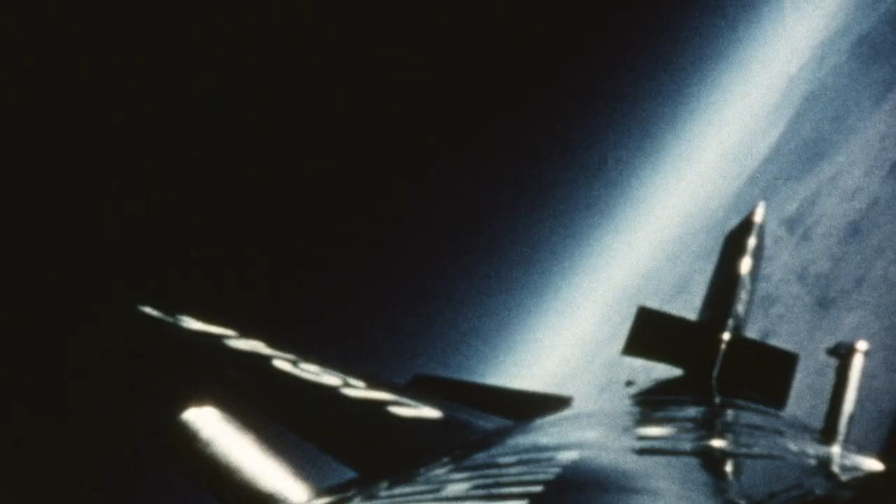Flashing across California desert skies, the airplanes you see here are writing new chapters in the story of man-made flight. There she goes. This is my first opportunity to greet you as Deputy Administrator of the National Aeronautics and Space Administration. Together, you and I must make our new agency the most unusual place.

An organization that can challenge conventional wisdom. We can engineer anything we can write the requirements for. We're going to make your idea work. This particular idea is quite disruptive. A typical flight, of course, starts under the wing of the B-52 mothership. This sleek, high-speed machine would have made Rube Goldberg proud.

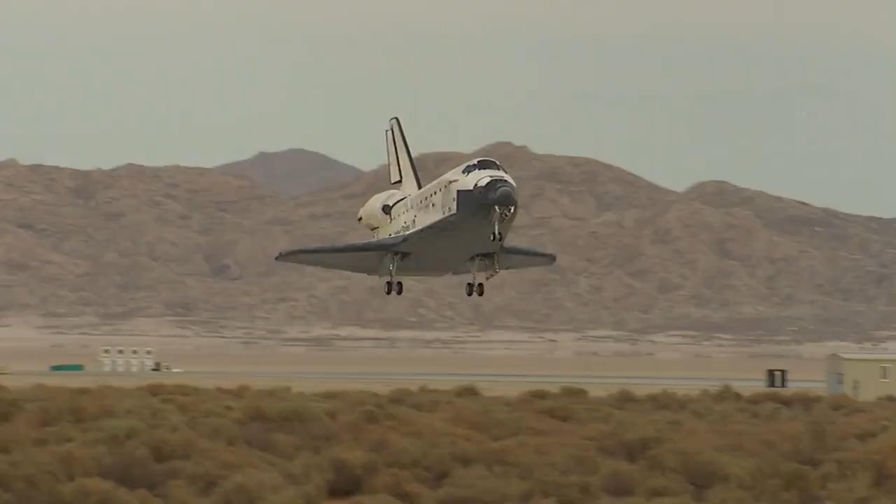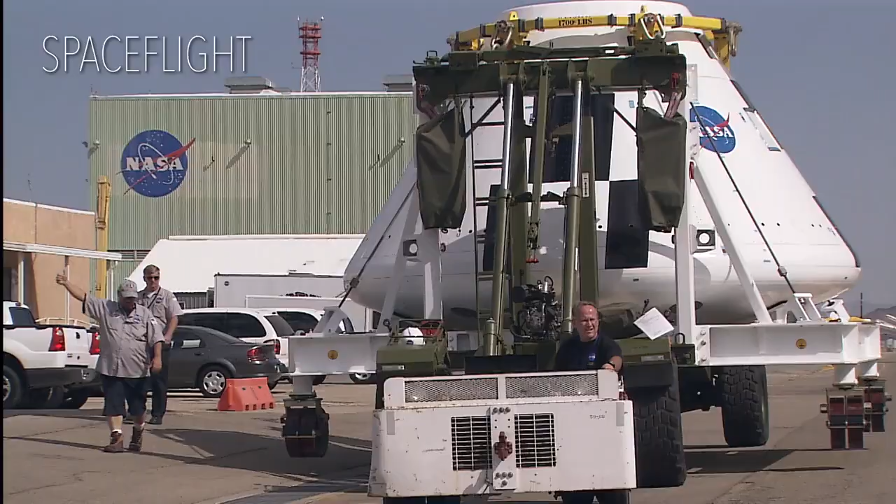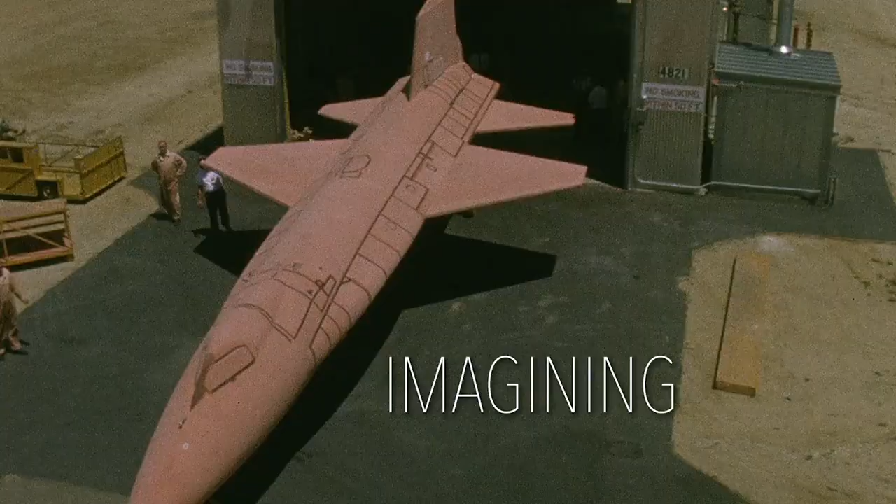The manner in which we fly re-entry from space on the space shuttle was pioneered on the X-15. The X-31 pretty much wrote the book on thrust vectoring, along with its sister program, the F-18 HARV. An observation of an occultation is one of the more challenging missions that SOFIA can do. Right now, we are looking at the dawn of a new era of aviation.

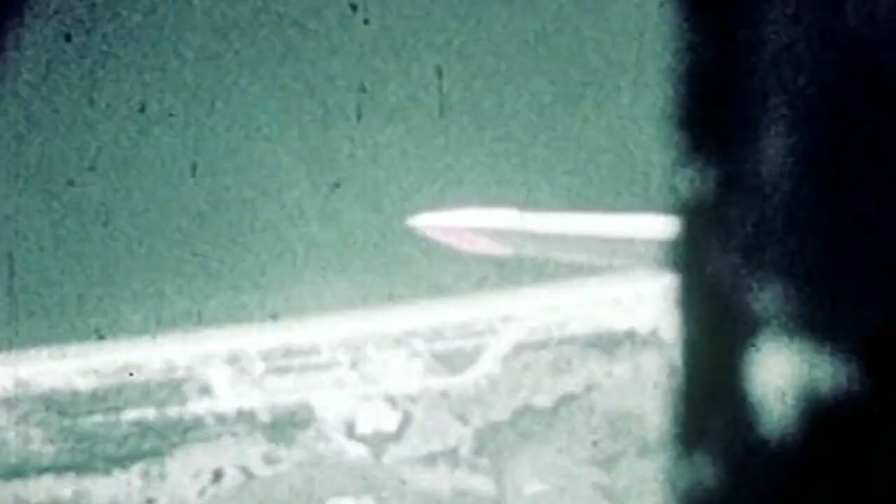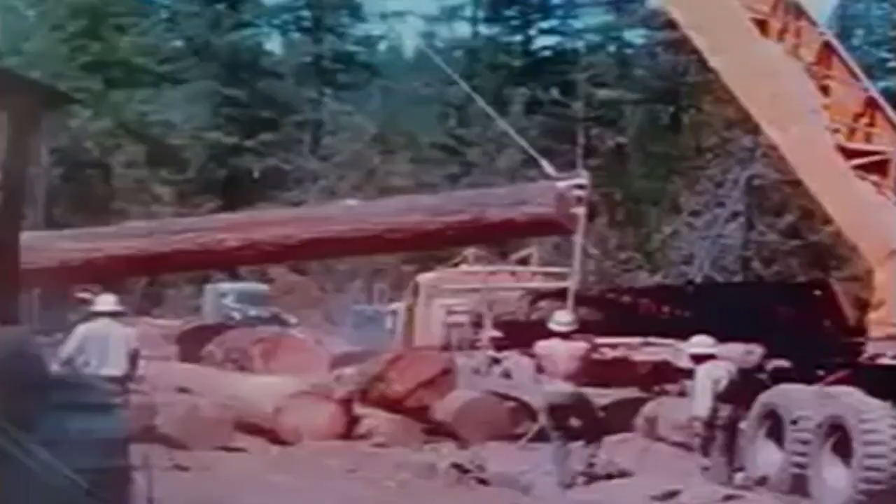Pollution was always something we saw close up, or not at all, until the National Aeronautics and Space Administration gave us a global view from high above. As the world's population continues to grow, our need to use our natural resources wisely becomes more apparent and urgent. We're in an energy crisis now, and will be for some time to come.

Attention all passengers, Flight 307 is canceled until further notice.

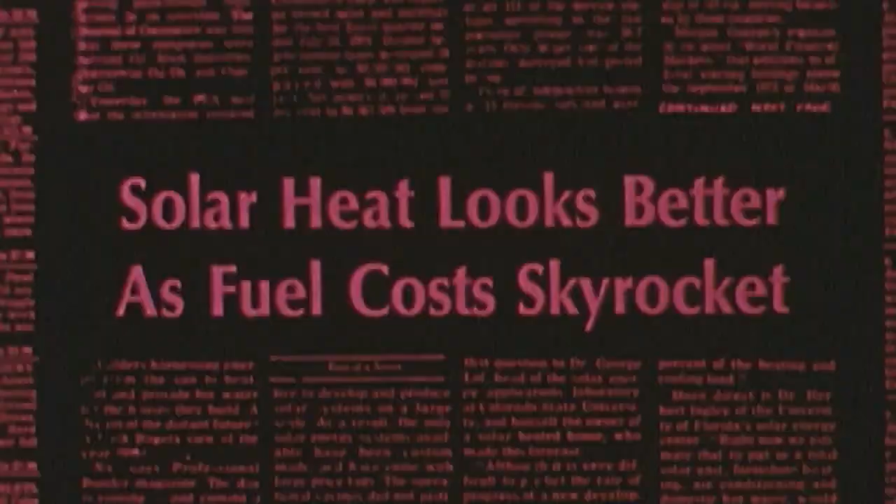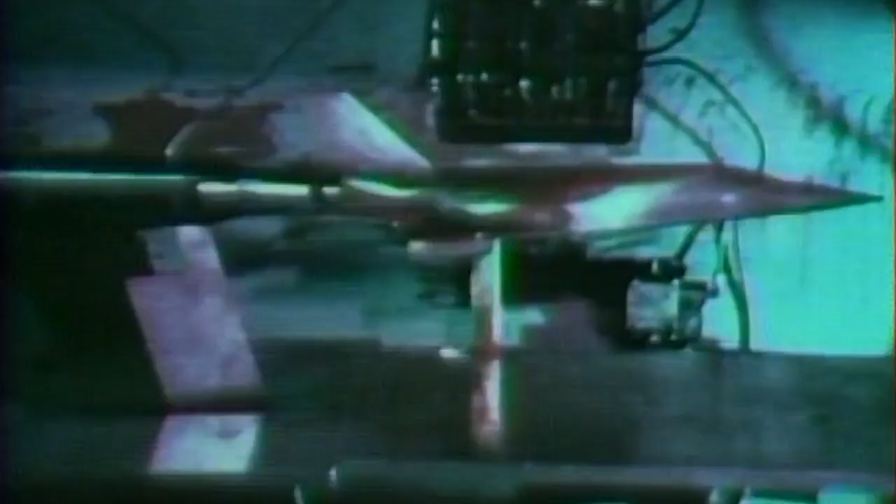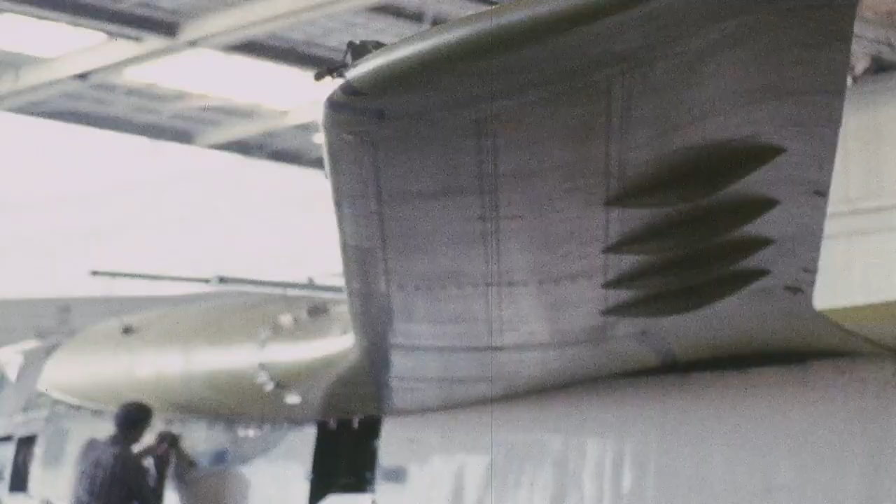We must change if we're going to have the energy we need. Until very recently, the priorities of aviation science have remained unchanged. Only in the 1970s have the need for greater efficiency of men and machines led to new and revised priorities for aviation researchers. A new airfoil shape called the supercritical wing is being flight tested aboard an extensively modified F-8 jet aircraft. Almost the direct opposite of conventional airfoil shapes, the supercritical wing has a flattened top surface.

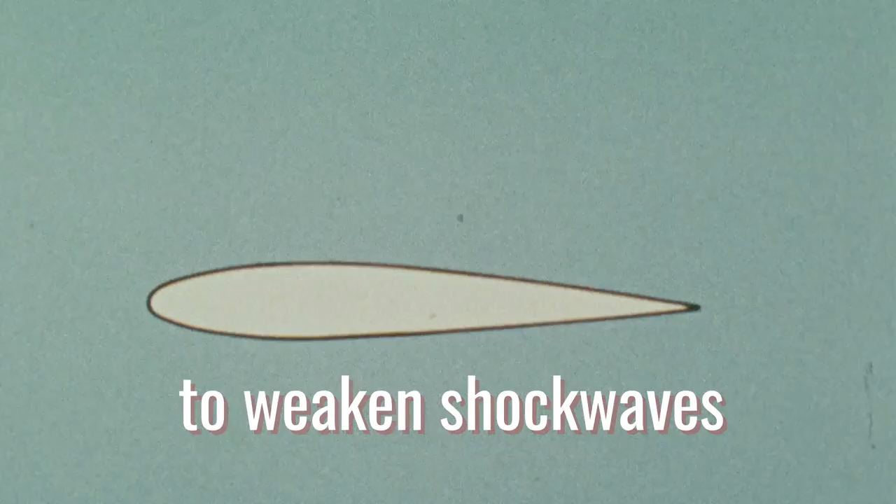The new shape weakens the shock wave that normally builds on top of conventional wings during flight, allowing the aircraft to fly faster, more smoothly, and at lower operating costs. And that concept ended up making a significant contribution. The supercritical wings are today used on almost every transport manufactured. Had the supercritical wing F-111, which did supercritical wing demonstration.

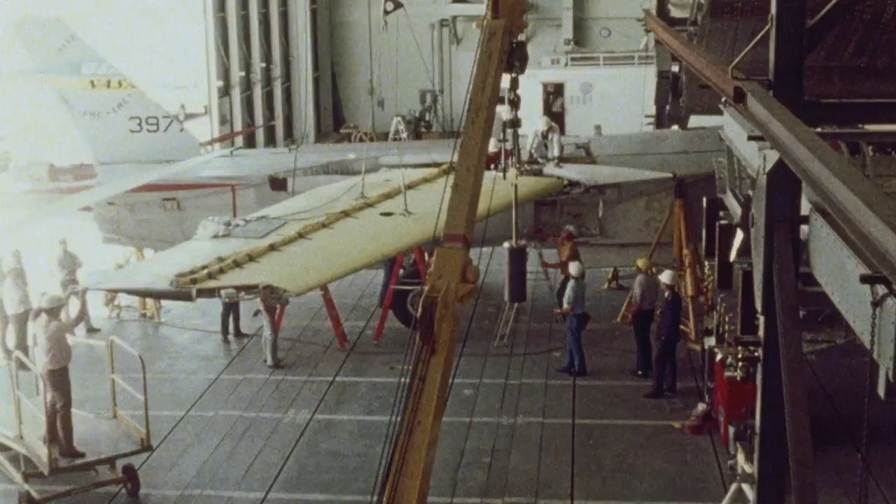The wings may be adjusted to various angles to achieve optimum performance at different speeds. Studies indicate that if the design features of the oblique wing were applied to full-size jets, it would give them increased fuel economy. The piloted version is now being built. The AD-1. During takeoff and landing, the wing can be positioned at right angles to the body for maximum lift. But as the aircraft picks up speed, the wing can be pivoted to cut down drag, and therefore fuel usage.

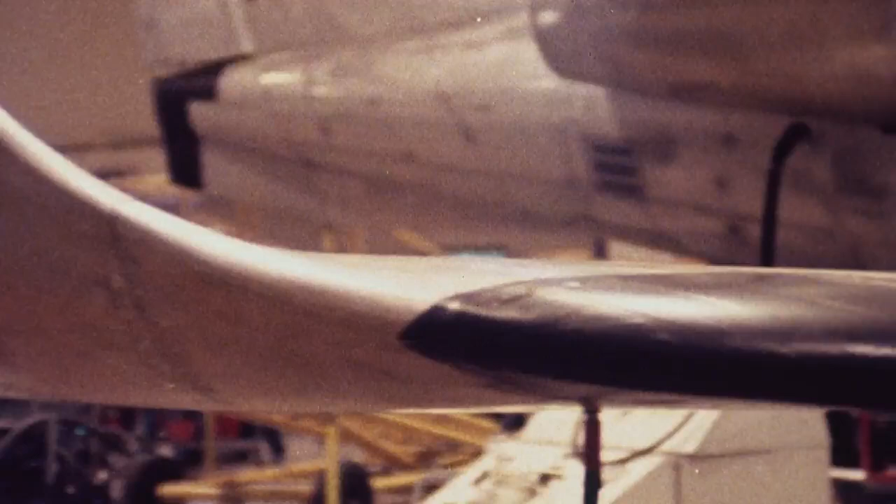Another project geared to improve aerodynamic efficiency, winglets. Engineers modified this KC-135 transport by mounting vertical extensions on its wingtips. These winglets act to increase lift and lower drag. Winglets cut wind resistance. NASA scientists developed the advanced winglet technology to cut wind drag, thereby increasing airspeed and cutting fuel consumption.

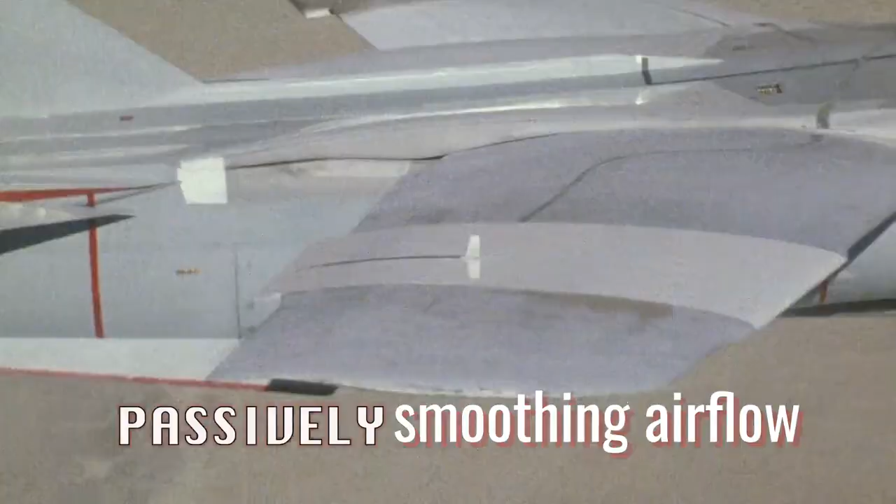Dryden researchers are using an F-111 to study ways of developing more efficient wing shapes. In the natural laminar flow experiment, they modified the plane's outer wing panels. This new wing shape eliminated turbulent airflow over much of the wing surface.

For functional versatility, one of the most promising ideas tested here is the tilt rotor. The XV-15 research aircraft combines the vertical takeoff capability of the helicopter with the speed, range, and fuel economy of a turboprop airplane. These types of aircraft use less room for takeoff and landing and keep noise and air pollution lower than our present commercial planes.

With the continuing fuel problems, engineers are attempting to make the big trucks more efficient. It's believed that both trucks and recreational vehicles can be made more economical to operate. Means of achieving aerodynamic efficiency on aircraft isn't that different than it is on automobiles and trucks. Starting with a small delivery van, Ed Saltzman and his team of engineers reshaped the vehicle with sheet metal.

The aerodynamic improvements that we've experienced so far are translatable into 15%, perhaps 20% savings in fuel. The researchers are hopeful as they continue to apply aerodynamic techniques to help solve a ground transportation problem. During the 1970s in the aviation field, fuel rose from the least expensive operating cost for commercial airlines to the most expensive. By 1979, the cost of fuel quadrupled.

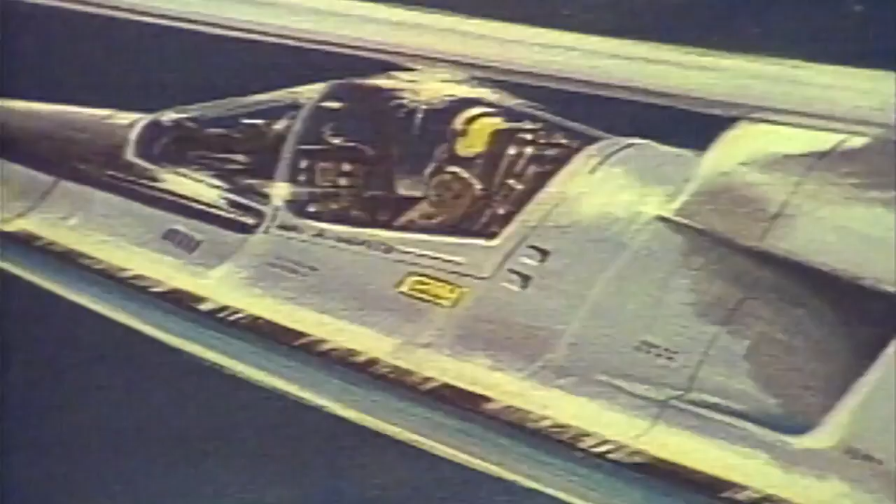A digital fly-by-wire flight control system crucial to automation of the X-Wing's flight mode conversion and circulation control aerodynamics has reached the laboratory test phase. Has the dream of combining the best attributes of both helicopter and airplane been realized?

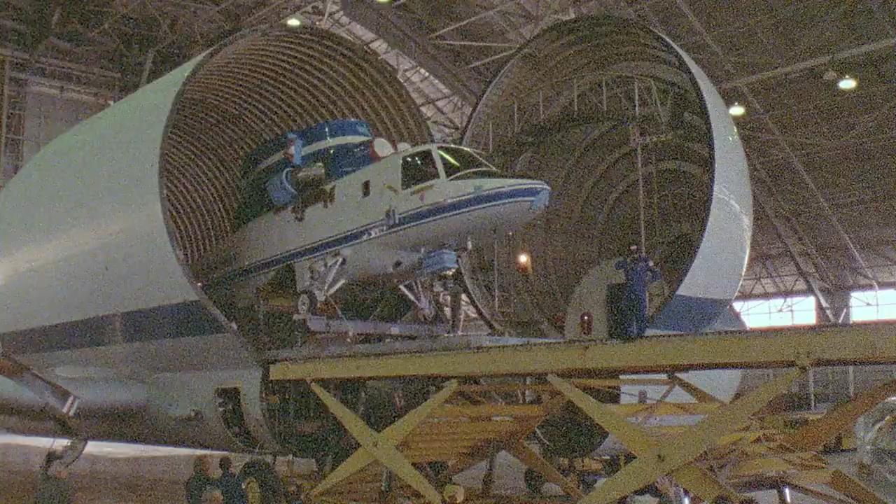The X-Wing system will begin flight tests later this year to investigate advanced rotor concepts. Its broad range of mission capabilities capitalize on its ability to combine the unique hovering qualities of a helicopter with the high cruise speed and range of an airplane.

The F-14 Variable Sweep Transition Flight Experiment was originated to obtain accurate in-flight measurements of the boundary layer transition location for wing airfoil pressure gradients. The wing panels of the F-14 were modified to maintain laminar flow to a significant extent.

Because of the energy crisis, I was working on the Jetstar. We took the wing tanks off the Jetstar and we put an experiment for laminar flow control. This was like subsonic laminar flow control.

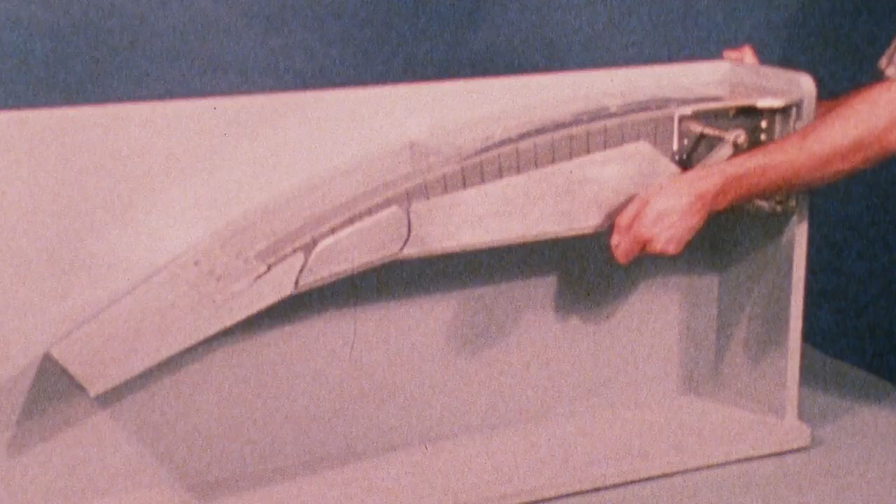Birds change the shape of their wings according to various flight conditions. The ideal wing would have a smooth contour upper surface and be able to rapidly and precisely change its shape to provide minimum drag for the amount of lift being commanded by the pilot.

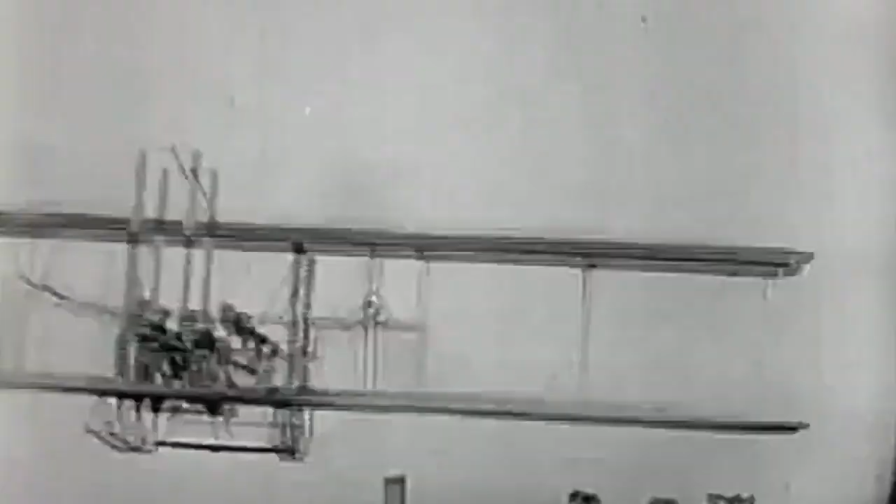The Wright brothers in their Wright Flyer also used wing warping. So the idea is not new, it's just that the technology has now developed to the point where it is practical. This is the Mission Adaptive Wing. This flexibility is possible because we now have composite materials that will withstand nearly continuous bending without fatiguing, and lightweight digital computers that can operate at speeds sufficient to control the wing.

Through in-flight contour changes, internal mechanisms bend flexible leading and trailing edge surfaces to the appropriate curvatures required to maintain the optimal aerodynamic effectiveness at all times. The Mission Adaptive Wing, an attractive technology for future military aircraft. It's really the first time that a wing would actually provide optimum performance throughout a very large part of the flight envelope.

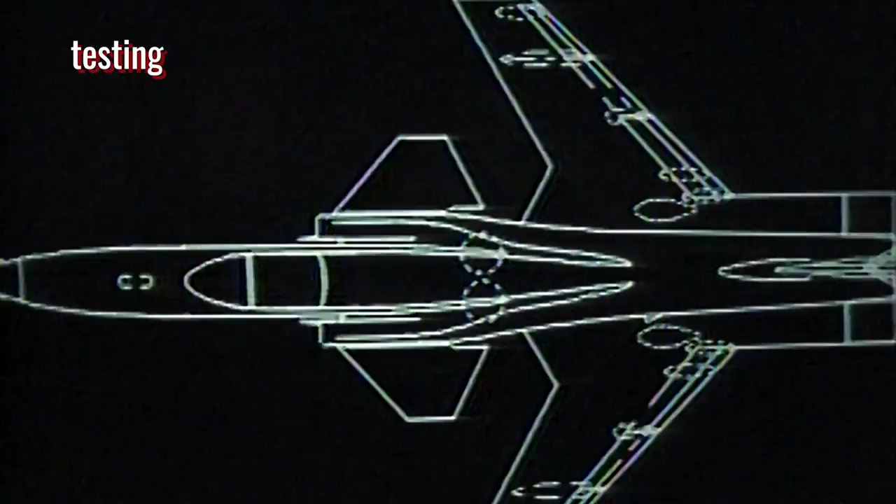The C-140 Jetstar currently is test flying an advanced propeller model, which should lead to considerable fuel savings in future aircraft. Basically, a forward-swept wing design is potentially more efficient in the transonic speed regime. The forward-swept wing has a supercritical cross-section about 1/3 the thickness of a typical supercritical wing. A discrete variable camber device is installed on the trailing edge of the wing.

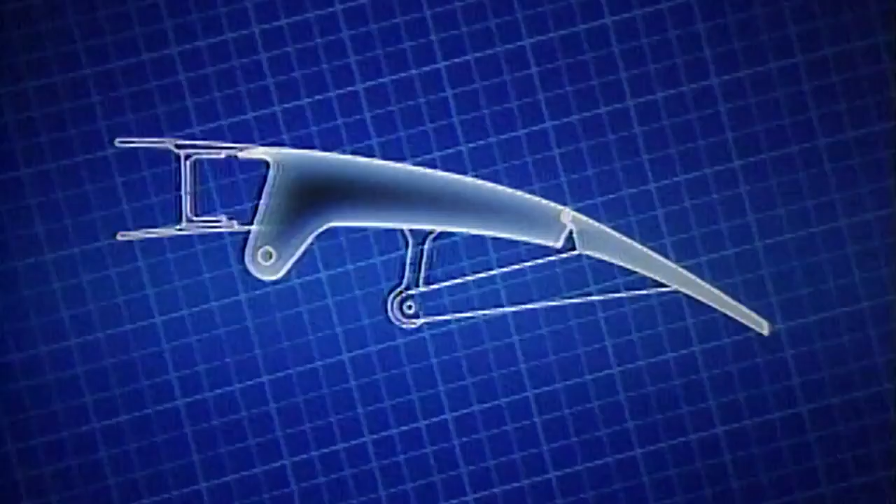Set back on the fuselage, the forward-swept wing configuration also affords a more flexible payload distribution, which makes for a smaller, lighter aircraft. Tactically tougher to see, economically less costly to build, operate, and support.

The F-16XL aircraft is uniquely characterized by its large cranked arrow wing. The aircraft will be used by NASA as test beds to evaluate aerodynamics concepts designed to improve wing airflow during sustained supersonic flight. We know that we can get laminar flow an inch or so back.

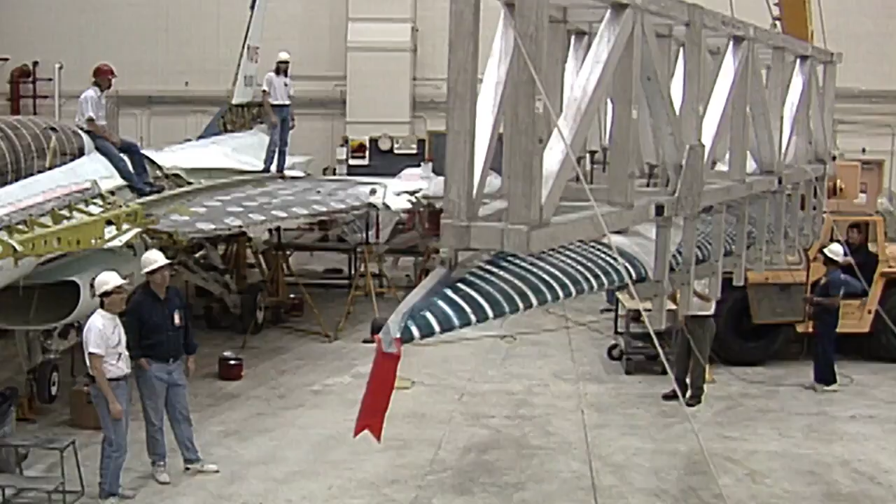Now we're trying to maintain it further aft, and in order to maintain laminar flow further aft, we have to come up with some method of augmentation, and that's why we're using suction to actually pull the boundary layer back down and relaminarize the boundary layer. We've actually perforated the surface of the wing with millions of microscopic holes, and we suck a portion of the airflow away from the wing to help keep it stable.

If you maintain laminar flow for a larger distance, you can reduce the drag of an airfoil, and if you can reduce the drag, you can increase your fuel efficiency. If you can increase your fuel efficiency, you can increase your payload capability. And, you know, it's just a whole raft of things that come out of being able to maintain laminar flow.

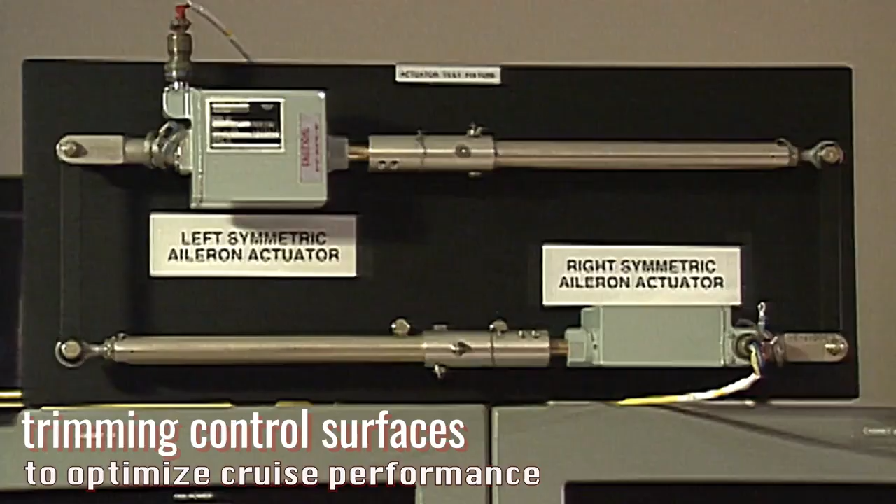Ailerons are normally used to roll the aircraft, which is then used to turn the aircraft. We intend to use only the outboard ailerons and move them together, both up or both down, to change the tailoring of the wing so as to optimize the flow characteristics.

I can deflect the inboard section downwards while deflecting the outboard section upwards. This will create an unbalanced force on the wing, thereby twisting the structure in a new way, different than we've seen before. These morphing structures of the future are likely going to be able to sense the environment and adapt, change their shape to particular flight conditions.

The design will be able to take material out, make the wing thinner, and that makes it a more efficient wing. This is a project that's trying to see if there's an advantage to flying 2 or more aircraft in formation, much like flocks of birds. Every wing creates a wingtip vortex, and if you can put your airplane on the part that's going up, then it's just like riding a wave at the beach.

The lead aircraft signals its position to the follower with a wireless modem. You couldn't do this without fly-by-wire. The vortex can be so strong that the conventional flight control system, it'll flip you out. But it's a high energy source, and if we can properly map it and know where it is, and then use that energy to our advantage, we're expecting to extract out at least a 10% drag reduction. It's one of the first times that this has ever been tried with a civilian airplane.

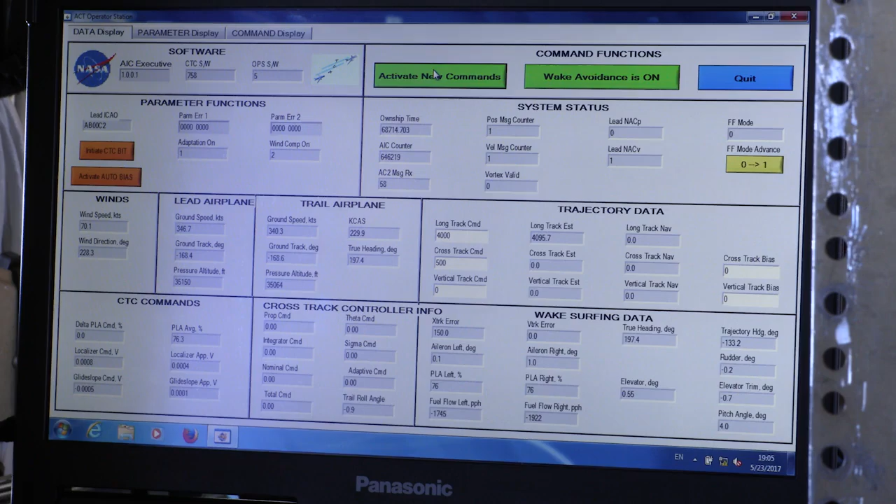What we wanted to expand was to use production autopilots, the FAA mandated data link. Let's go ahead and try to step in toward the wing. Ways that you could improve the efficiency of vehicles by not changing the vehicles at all, but by changing how we use them for operational efficiencies. Even if you didn't want to fly in the wake, if you wanted to, for instance, avoid the wake, you could still fly closer than what is currently allowed.

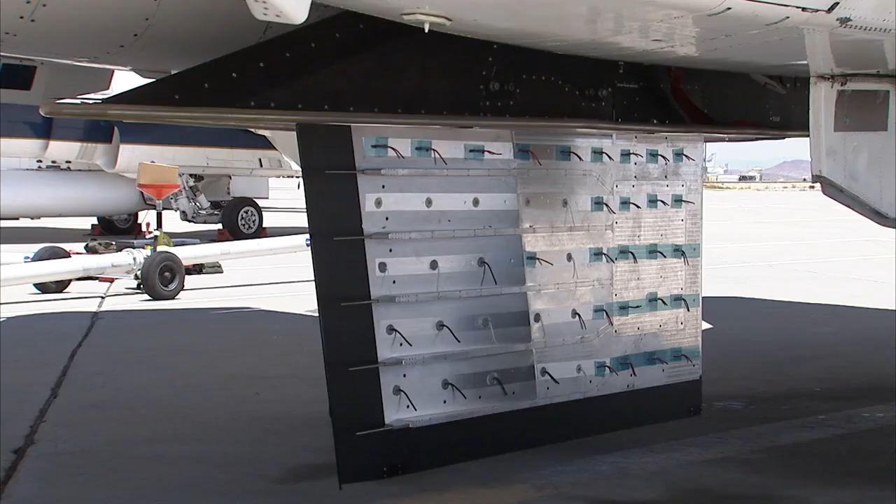BWB is a combination between a regular aircraft and a flying wing. It actually has a lower drag than a conventional aircraft. It's like a hybrid car compared to a regular car. You're getting 20 to 30% better fuel efficiency. By understanding the boundary layer transition, we can increase our understanding and our predictive capability for all types of aircraft, both for civil and for military aircraft.

People take it for granted nowadays that an airplane needs a rudder in order to turn. Think of every bird you've ever seen, none of them have rudders. The Prandtl-D aircraft is designed with a certain twist in its wing. A different lift distribution. A new span load on the wings. What we're really looking for is the positive correlation between roll and yaw. Prandtl does not need winglets. It does not need a vertical tail. There's only 2 control surfaces.

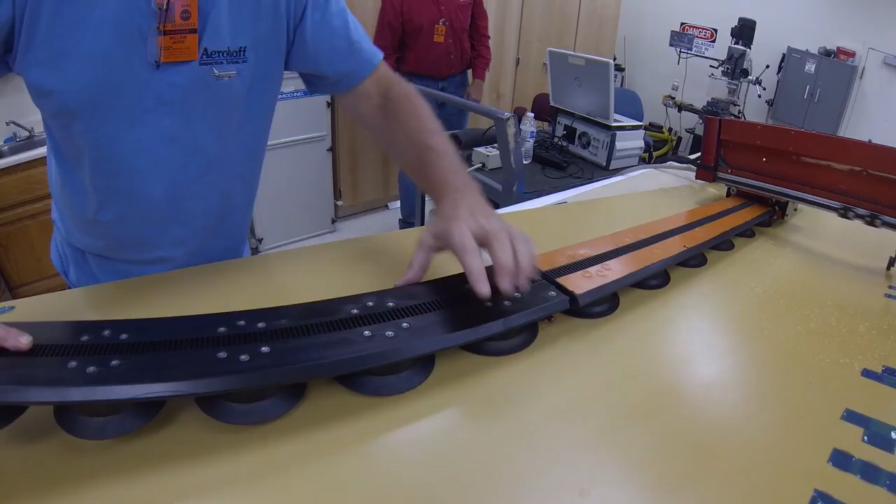The design of Prandtl minimizes drag. This doesn't have any hinges, it just bends. It morphs itself, if you will, sort of like a bird flies. The efficiency of this technology is very significant, and it results in fuel savings up to hundreds of millions of dollars a year.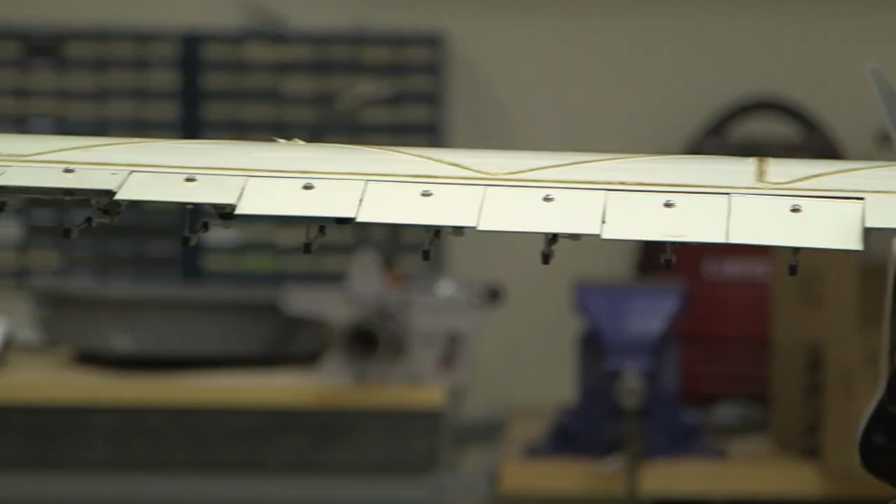A traditional wing has 1 flap and 1 aileron per wing. We broke those up into segments, and that allows us to reshape the load using localized input or small inputs rather than the whole control surface. We'd like to develop some research that can be used to minimize the amount that structures deflect, minimize the amount that structures vibrate. It's an attempt to redistribute the load into a more favorable configuration. That configuration will allow for lighter weight structures in the future.

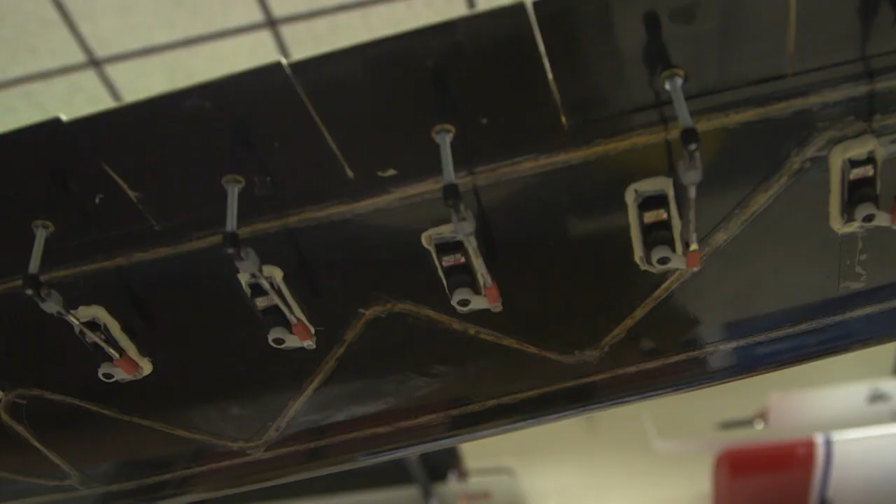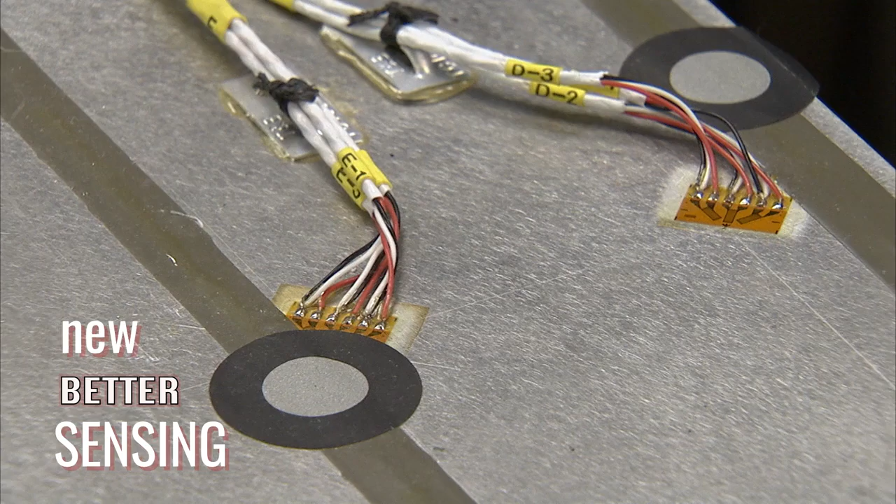The first step towards wing shape control is knowing what the position of that wing is, so that can be fed into a control system to then control the shape. Conventional sensor technology allows you to make a measurement every several feet. The FOSS technology allows you to have a sensor every 1/4 inch along the single optical fiber. That allows you to look more and more like a biological system. If you can save a few pounds of instrumentation mass or lead wire mass, that's more fuel and less cost.

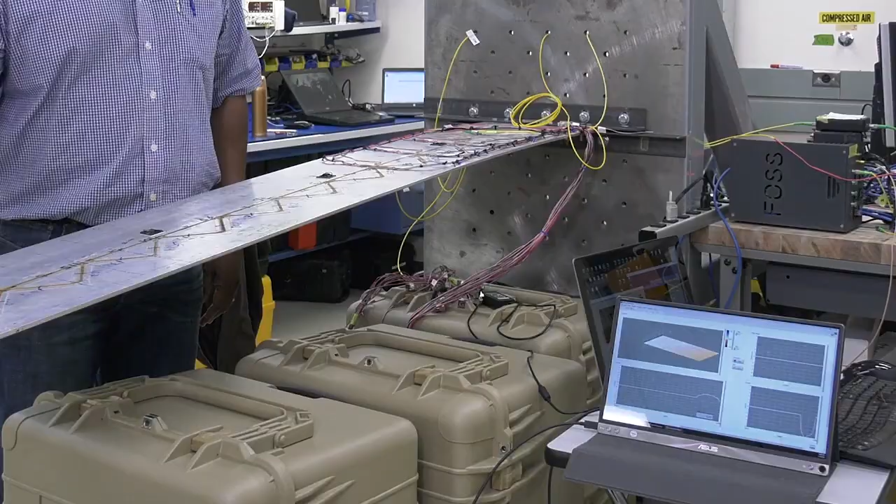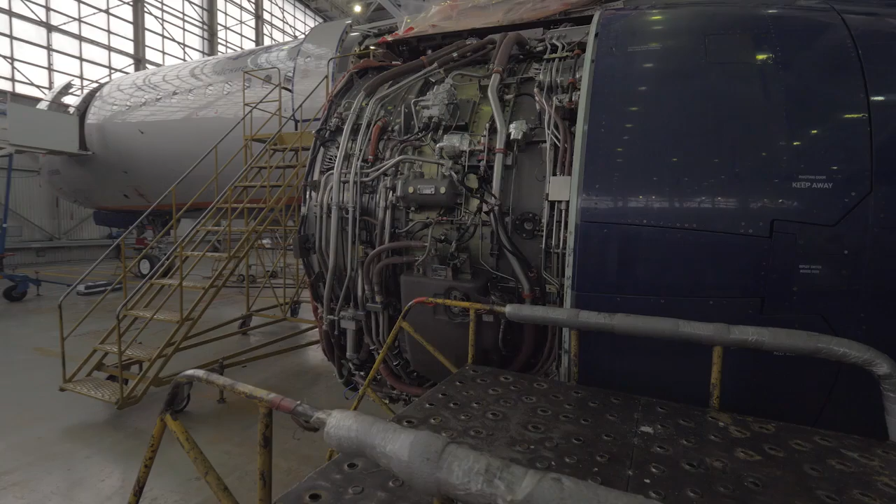That fiber can remain on the vehicle throughout its life. Now aircraft are taken out of service and maintenance inspections are applied at given intervals. Wouldn't it be better to take an aircraft out of service when your management computer has told you that it's time for service and here's why?

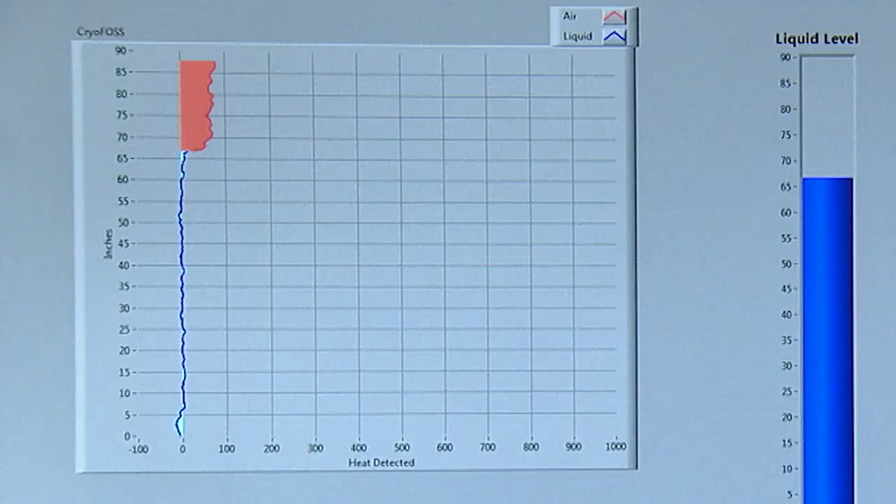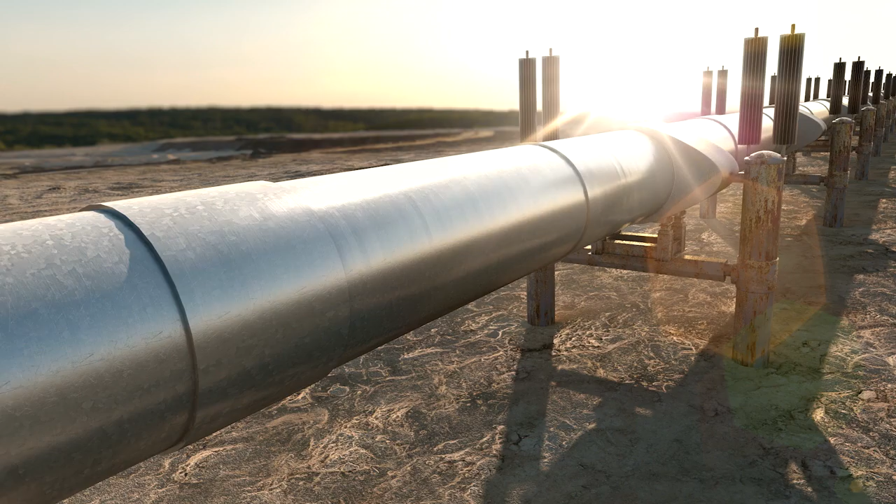The FOSS is capable of measuring critical parameters such as temperature, strain, liquid level, loads, and deflection. I believe it can really revolutionize the way we do our business in aerospace. And it has that spillover effect that can go into other types of industries like oil and gas, shipbuilding, health monitoring, high-rise health monitoring, all types of other applications.